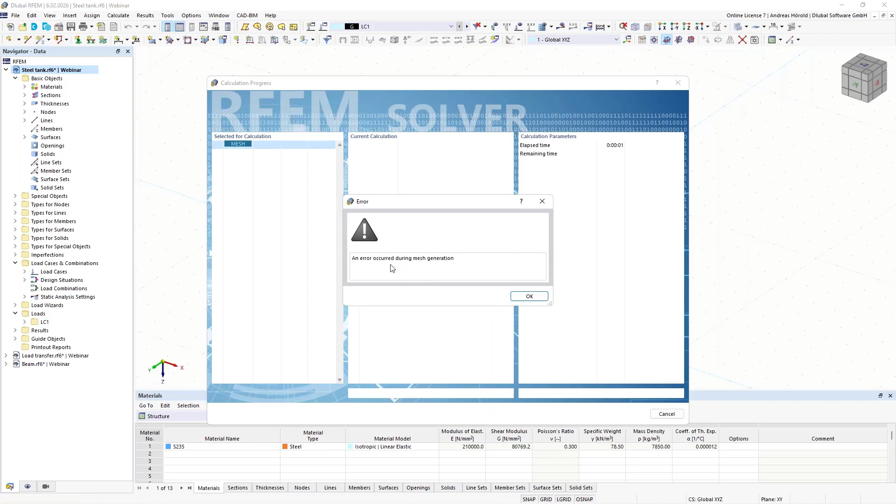I wanted to introduce the Dlubal extranet, and we turn to the next question and to the program. The next question is, why can't I mesh my model with curved surfaces? Okay, let's try it. We want to create a mesh, and we get this error message. It's currently not possible to mesh a quadrangle area on the 360-degree circle. We are working on a solution, and in the meantime, you need to use a workaround.

The surface must be divided into several quadrangle surfaces. I will show you how to do that. I delete the two surfaces. Then I copy these two lines during a rotation. I use the function rotate selected objects. I check create copy, one copy, 180 degrees. The axis should be the Z axis, and the rotation point should be the middle of the circle.

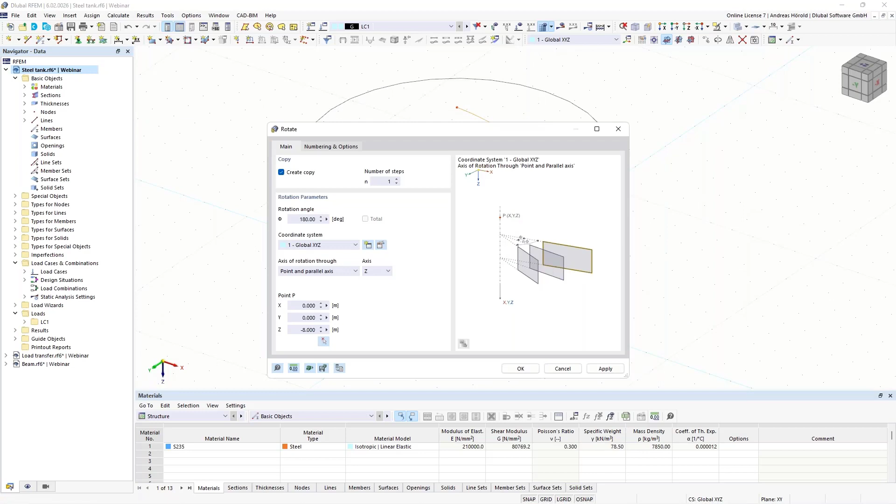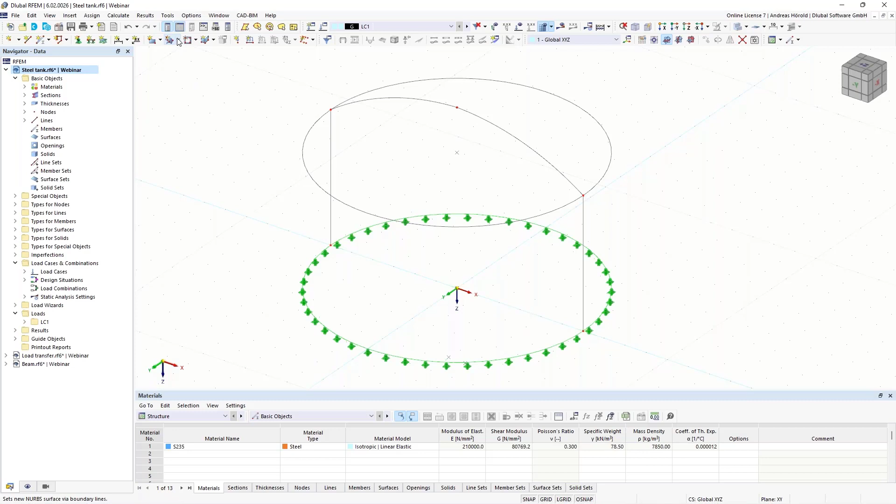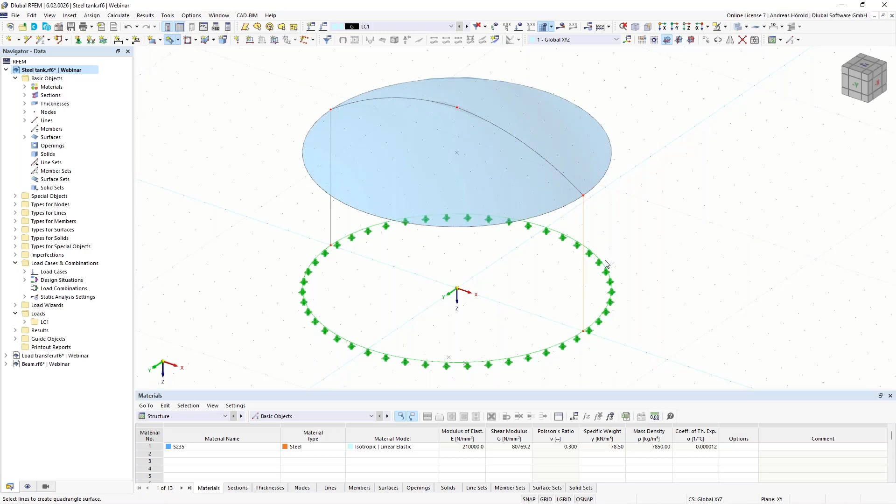Okay, then I use the function here right above, connect selected lines, and with that window I divide the circle into two lines, also the lower circle. Okay, now I can create the new surfaces. That should be quadrangle surfaces, with the same thickness as before, 12 millimeters. Okay, and I select the boundary lines. And I create 4 surfaces now. Okay.

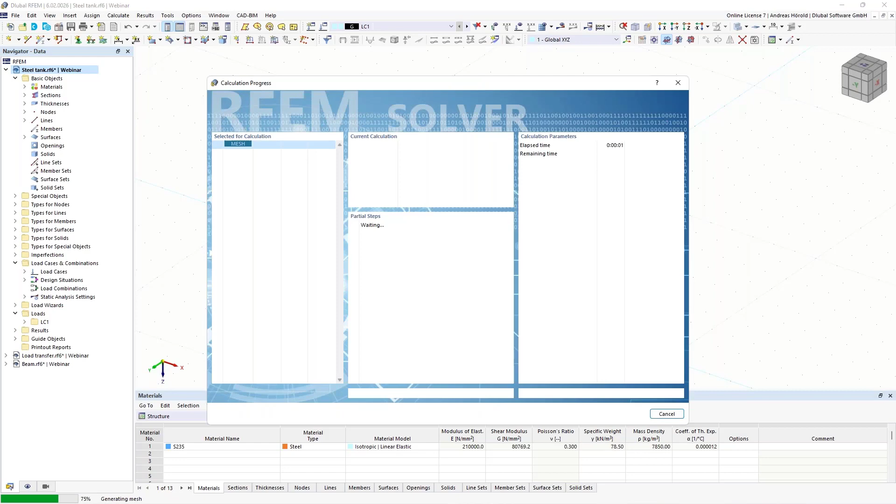Okay, and now we can create the mesh. Okay, that works. Now it's only a workaround during the correcting of that bug. Okay, then we turn to the next question. How can free nodes be deleted? From time to time during modeling or after an import, it can happen that free nodes are created, for example, when you import your model from a CAD program. These nodes can easily be found.

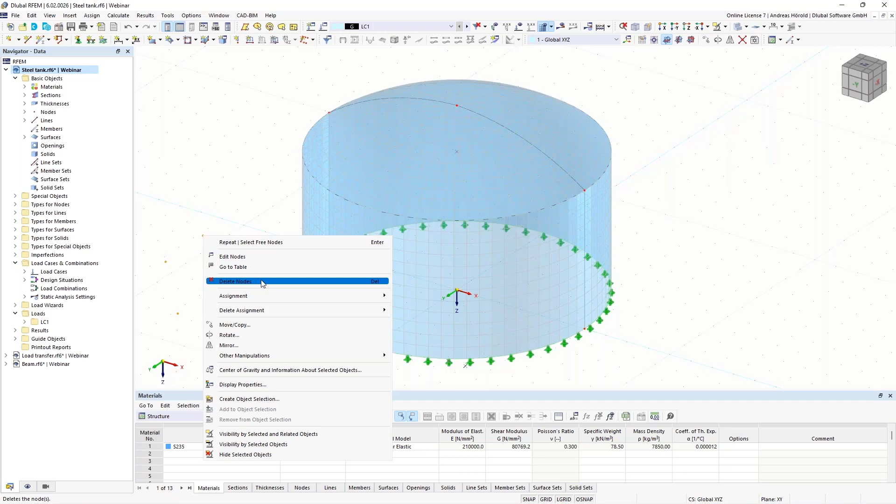At first, I create some free nodes. Okay. And I can find them with Edit, Select, and Free Nodes. There's also a shortcut, Control, Shift, and F key. I select them with the function. You can see now they are yellow. And you can delete them by pressing the delete key or with a right mouse click on one node, and you can choose delete nodes. Okay, that's the solution for that question.

So then we turn to another model and another question. The question is, how can an areal load transfer be generated by a distributed load on members? There are 2 possibilities. The first possibility is to use a surface called load transfer, or the load wizard. I will show the two possibilities. So I start with a surface.

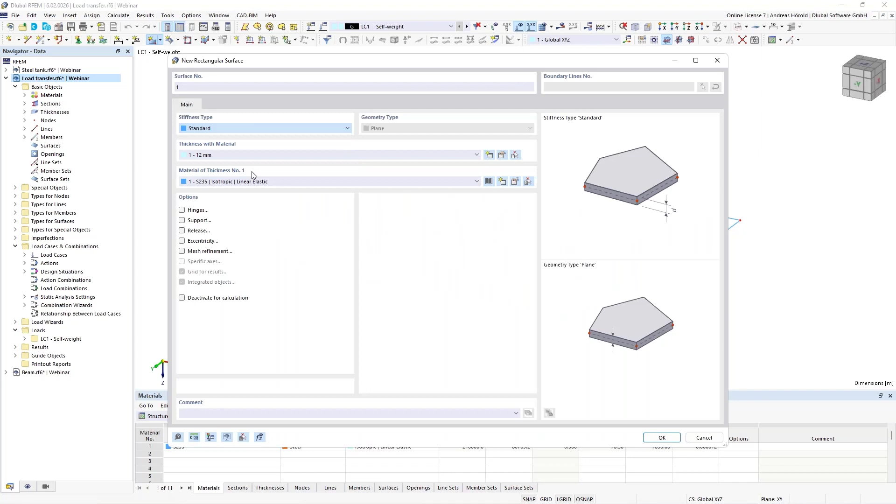Stiffness type is load transfer. That surface has no stiffness. Okay, I select the nodes here on the edges. Okay. So now we have got three surfaces, and we create a surface load.

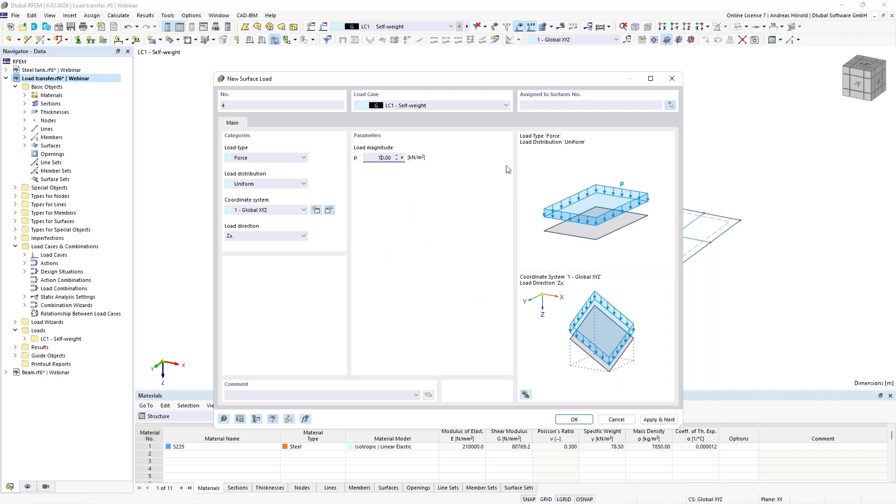I choose 1 kilonewton per square meter. 3 times. Okay. So, I can divide this load, or divide the display, for example by clicking on the surface and selecting display load transfer separately. Only the display is then separated.

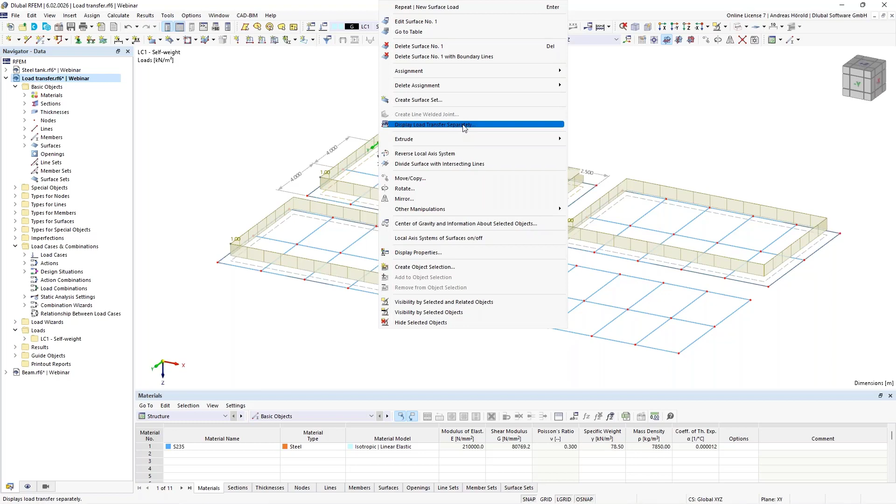So this is the first solution, and I can undo that and use the other solution. In the navigator display under surfaces, you can check display load transfer separately here. Okay. So let's change the load distribution.

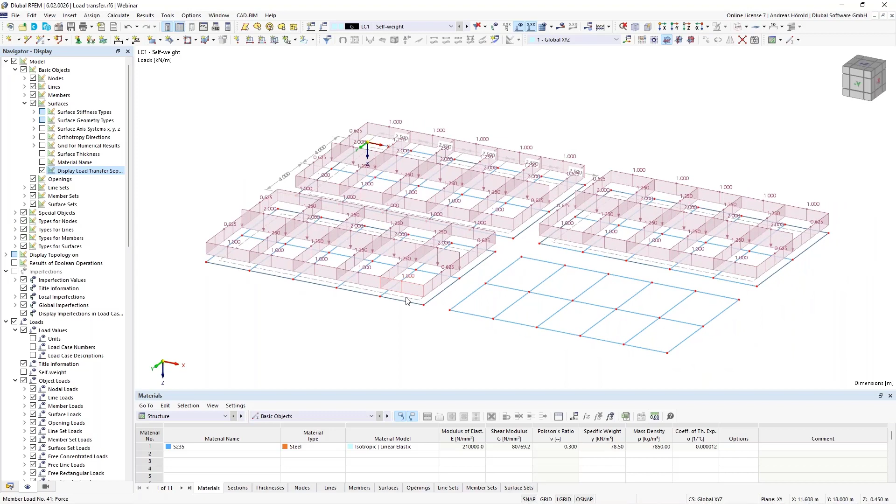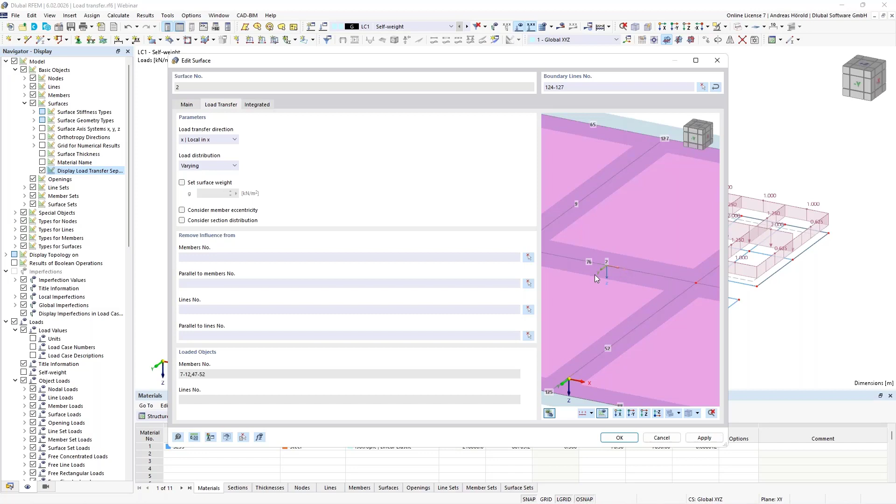I double click on that surface, go to load transfer, and can change the direction. At the moment it's both directions, and I select for this example local in X. If you click on that button here, you can see where the X direction is. That's the local X direction of the surface, and that's the Y direction. Okay.

So I can use the Y direction here. Double click, then Y direction. Now before I leave the dialog, you can select that button here and assign a load for the surface weight. Or you can remove members from the loading with, for example, that function here.

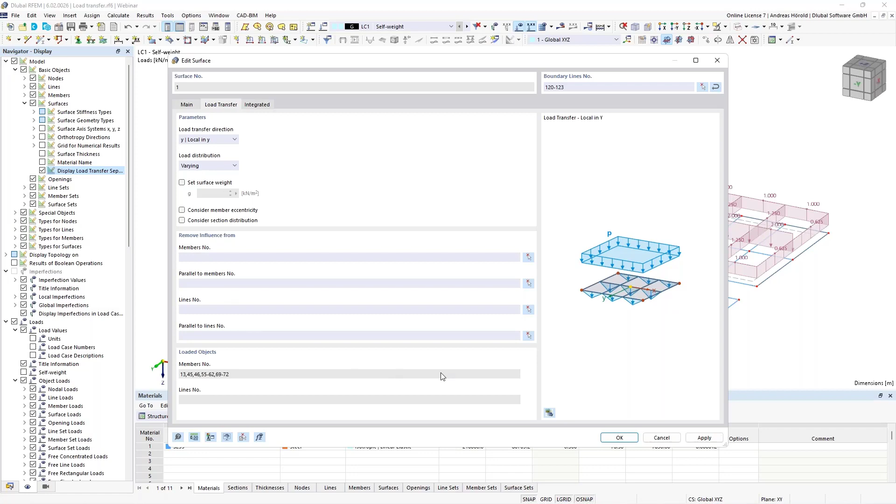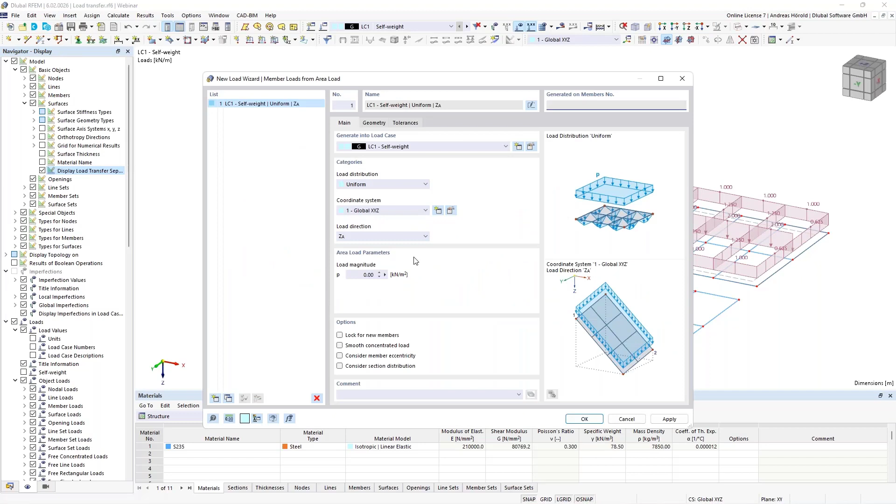Okay, then here we have got two directions. At the moment, it's not yet possible to assign a varying load, but you can do that with the load wizard. I will do that with insert load wizards, member loads from area load. So a load as well of 1 kilonewton per square meter.

Then I have to select the geometry, the 4 edges. Okay, and I can remove members from the loading. All members that are parallel to that member shouldn't get any load. Okay, and that's the same as for this surface. Okay, we can change that.

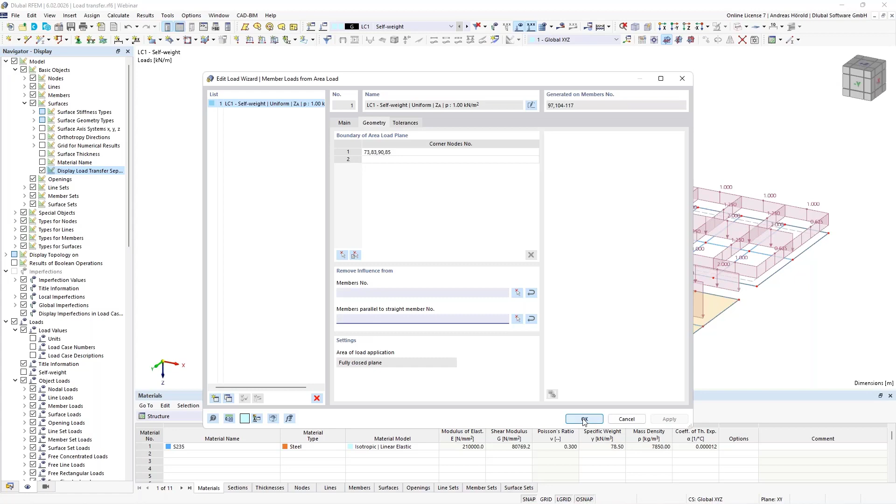I would like to transfer the load in both directions. Okay, and now you can see where the varying load is. Okay, those are the possibilities to assign loads or surface loads on members. Then we turn to the next question.

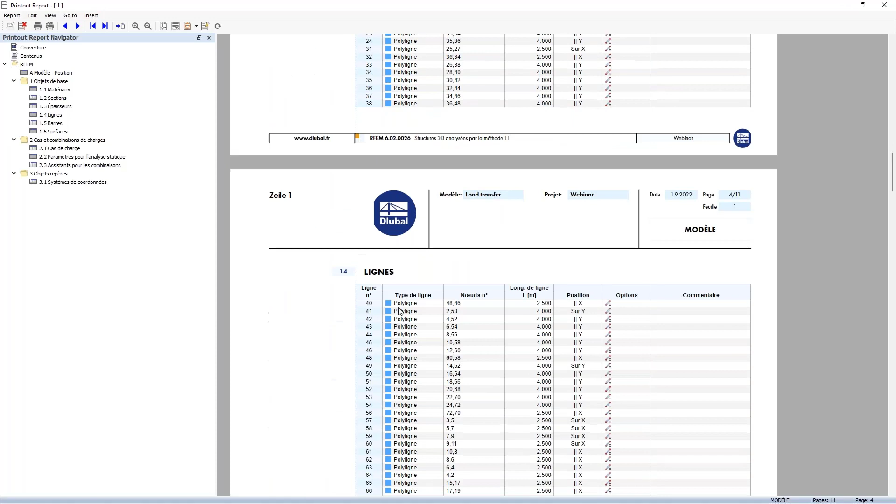How can I change the language in the printout report? I create a small printout report. Under edit, you can find the languages, and there are 11 languages. That means you can translate your printout report into 10 different languages, for example into French, and it takes only some seconds to translate the whole printout report. Now all is in French. So I use again the English language.

At the moment, it's not yet possible to create an own language or to add technical terms in a table. But we are working on that, and we will implement that in future. The next question is, how can I move a PDF file to any position in the printout report? You can insert different things, for example images, plain text, HTML files, formulas, and also a PDF.

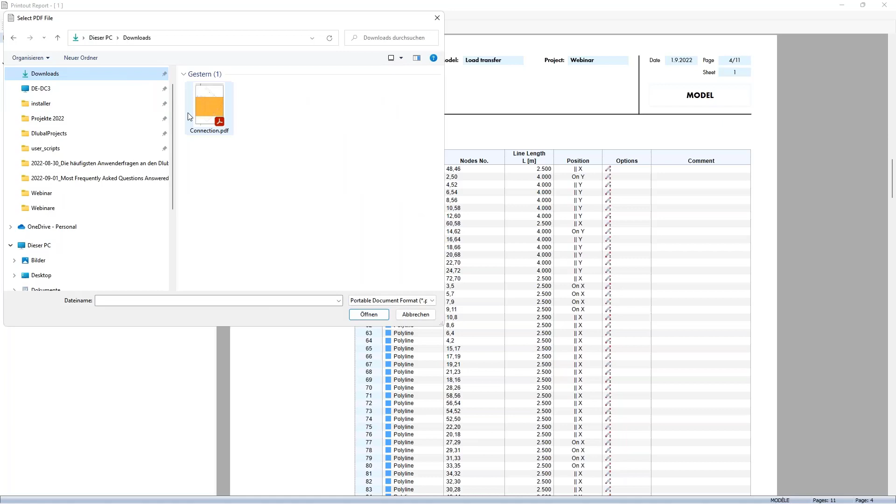I insert a PDF, only one page. If you've got more pages in the PDF, you can select only, for example, page 1 and 2 and so on. In my case, it's not necessary because I've got only one page. Then you can define left and right margins and so on. Okay, I must use all pages because I've got only one page.

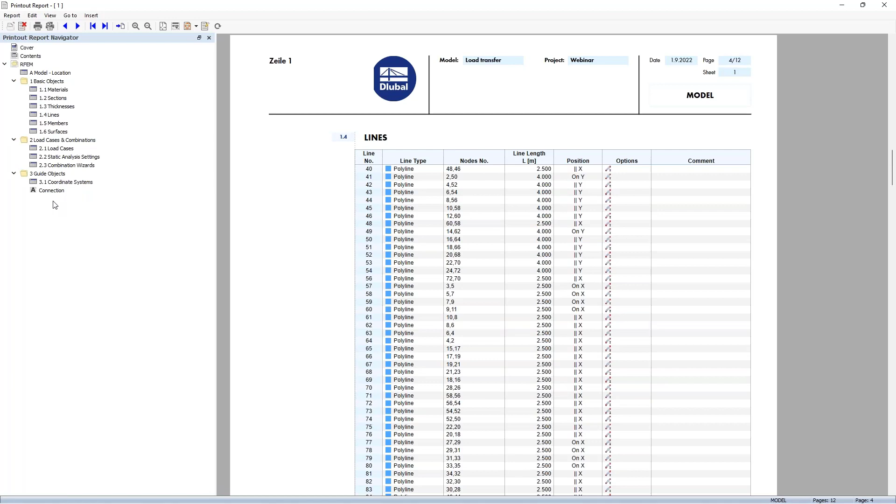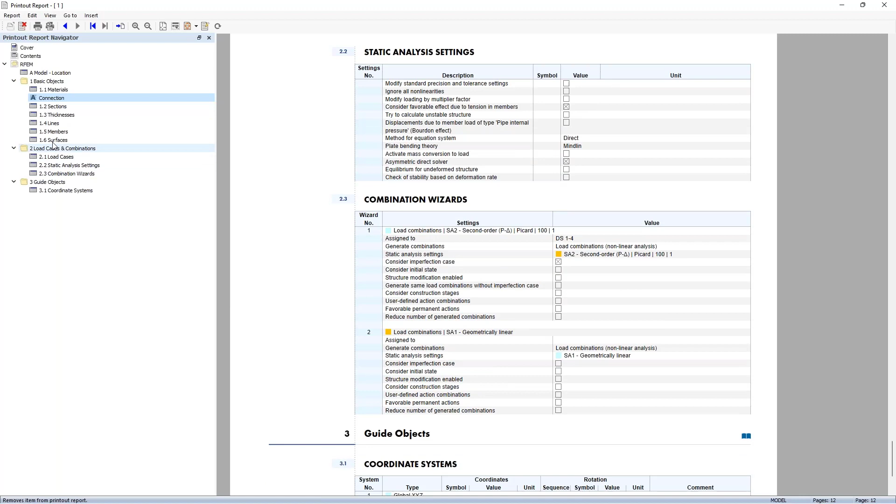So by default, this is always added to the end of the printout report, and it can be moved via drag and drop. Also with the right mouse click, you can move the item to the top, the paragraph, then move item down and so on. You can also move chapters by right click or drag and drop, and it will be renumbered.

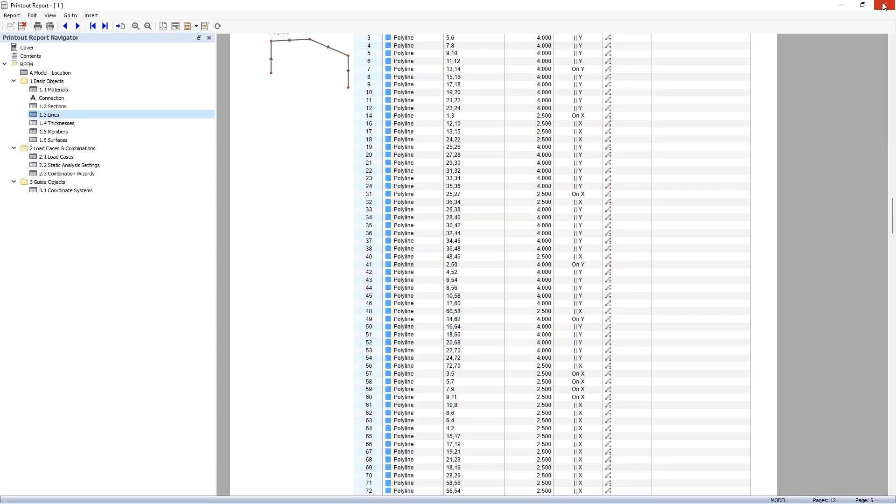And the same is valid for images, text blocks, and so on. You can see it's quite easy to handle. Okay, then I close the printout report. We turn back to RFEM, and the next question: how can I increase or decrease the loads uniformly in a load case? I let the loads display not separately, so that you can see the effect.

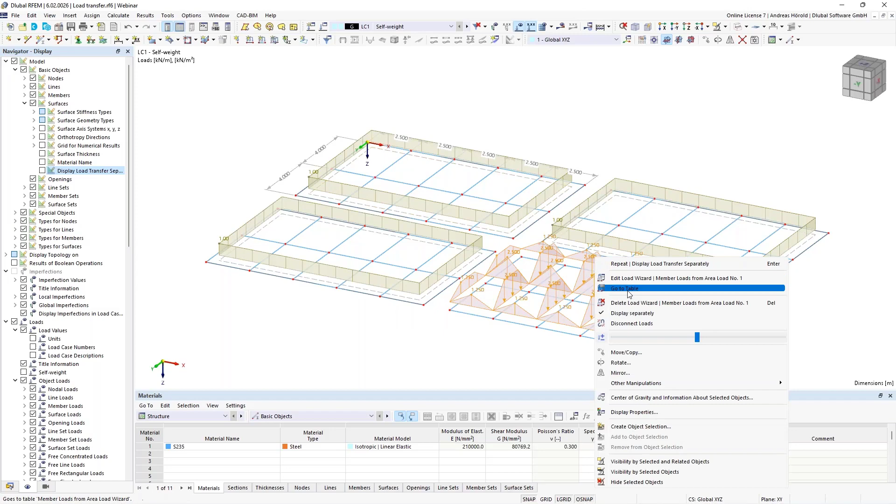Okay, now we've got the surface load of 1 kilonewton per square meter. And you can use that button above, edit active load case, or search the load case in the navigator data and double click on it.

And there are different static analysis settings available. By default, a load case has got the geometrical linear analysis setting. And for example, if you have got more than one load case and you would like to increase the load only for that load case, I recommend to copy that static analysis setting. How to do that? I use the right button here.

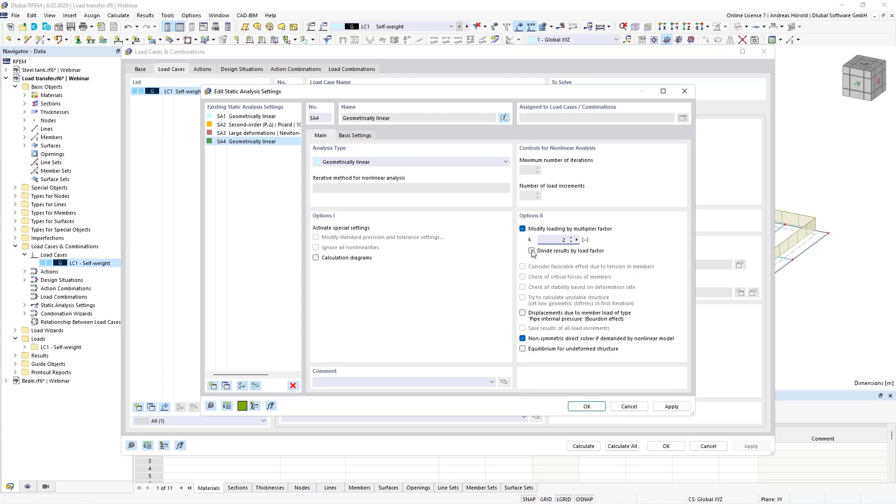So, and then I can copy that static analysis setting, and then here on the right side under options 2, I can modify the loading by multiplier factor. For example, I can use 2. You can also divide by load factor. Okay, and I leave the dialog and choose for the self-weight load case the 4th static analysis setting.

So, and then I can leave the dialog, and you can see 2 kilonewton per square meter has got the self-weight load case. Also that load for the self-weight load case. Yeah, and it's the same workflow for decreasing the load of one load case.

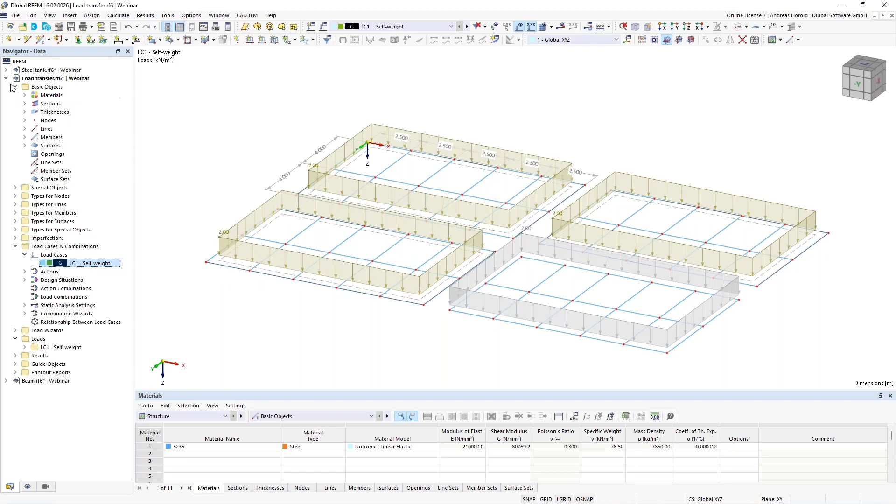Okay, then we turn to the next model and the last question. Why is reinforcement uniformly distributed around the circumference? When we display the concrete design and the reinforcement on members, you can see at the moment there's no required longitudinal reinforcement at the top and on the bottom. So how can we solve that?

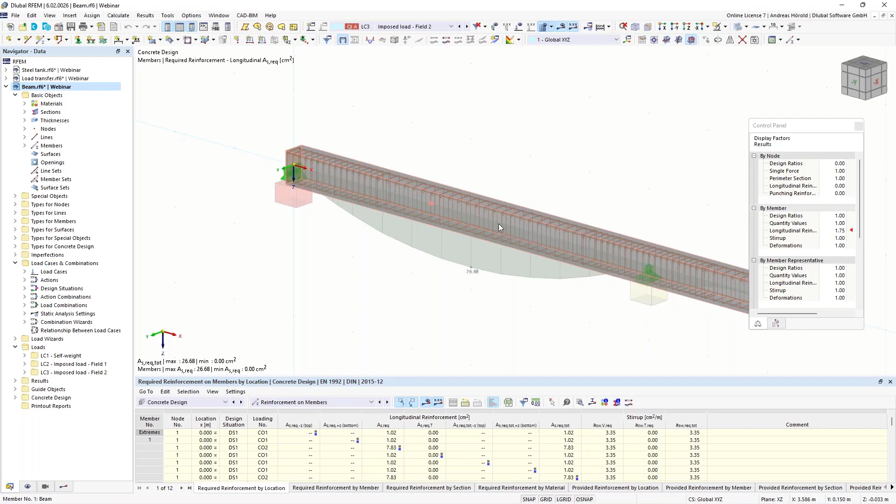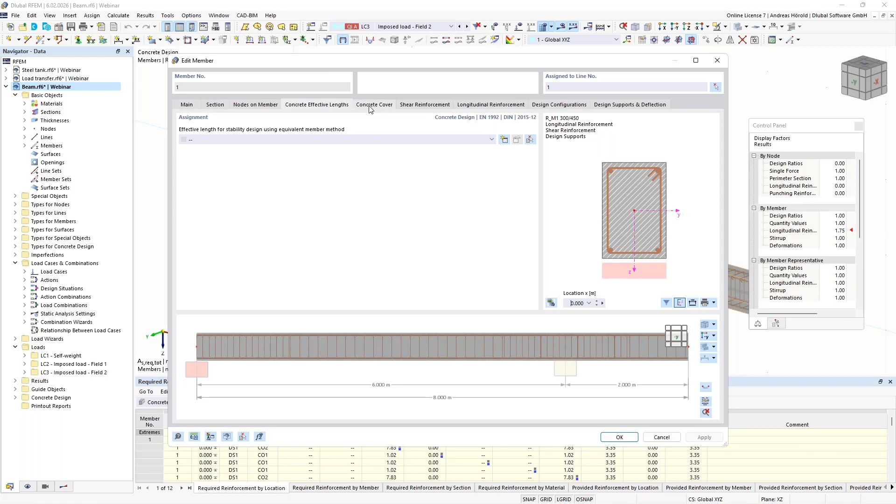You can double click on the member. Where are the settings for the member? I can shortly click through every dialog, main and the section, nodes on member, the effective length. If you have got effective length, you can take a look on the settings. For this member with bending, there are no effective lengths defined.

Then the concrete cover, shear reinforcement, and the settings for the longitudinal reinforcement. And you can see the rebar type here, uniformly surrounding. 4 bars, in every edge 1 bar, and I will change that to unsymmetrical. 2 rebars at the top and 5 on the bottom, and 1 on the left side and on the right side.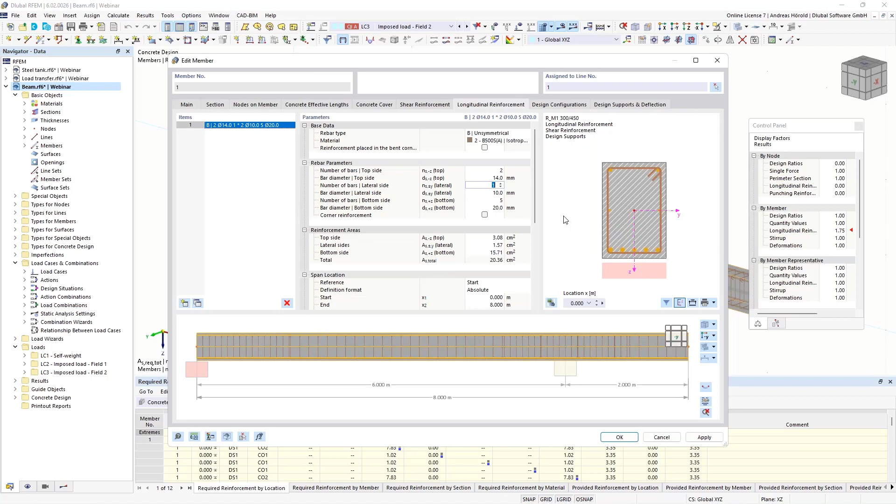So then design configurations, we will take a look and use the edit button. And you can see also here's a wrong setting. The reinforcement layout for the required reinforcement is uniformly surrounding, and I will change that to the top and bottom symmetrical distribution. Okay, then we can take a look at the stability. Also here is selected uniformly surrounding, and I use the same distribution, the symmetrical distribution.

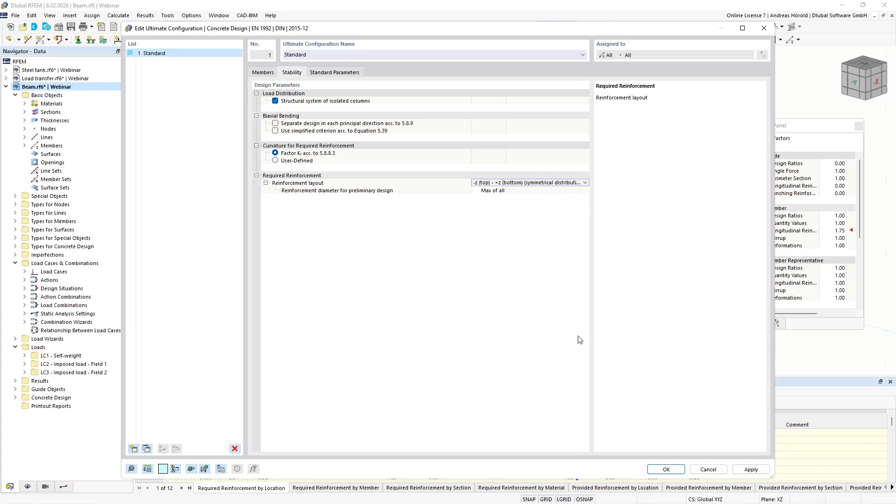Okay, then we can apply that and calculate all again. Now just take a look at the parallel calculation. Our solver uses all cores of your computer. So then reinforcement on members, and now you can see the required reinforcement on the top and at the bottom.

Okay, that should be all to the 8 questions.